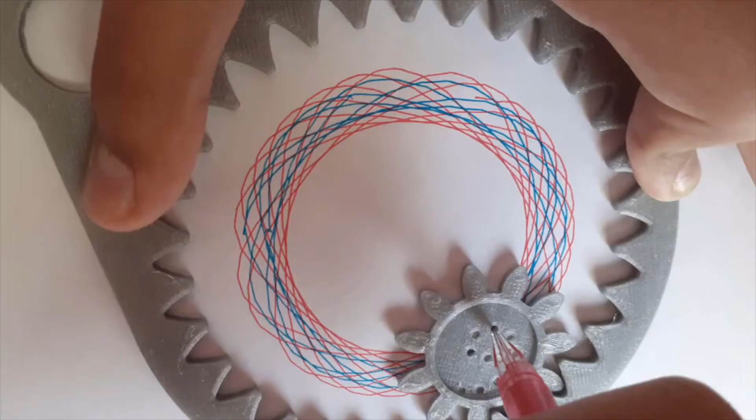Hi everyone, today we are making a puzzle cube in Tinkercad. This is a really interesting model because of all of the customization that it offers. We're also going to be taking a look at how the duplicate button works in Tinkercad, as it has a

really interesting feature. Let's first start by setting the snap grid on the bottom right corner to 0.5 millimeters. For me, the default was 1 millimeter. The snap grid just tells Tinkercad how much to move an object when the arrow keys are used.

When something is 3D printed, there's something called tolerance. This means that since the 3D printer has filament that it extrudes that isn't a perfect size, you have to give some space in the model for imperfections when you print. Since we're making a model that is meant to fit together, we have to be careful with tolerances to make sure everything slides together well.

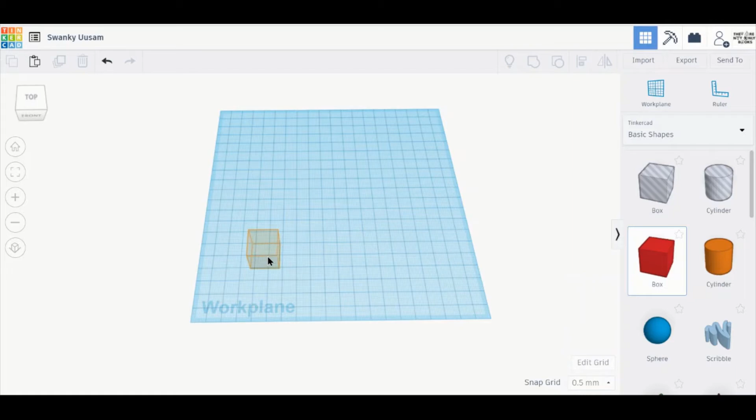Let's now drag in a cube. We're going to leave the size the way it is. Let's now click on the cube and press Ctrl D or the duplicate button on the top left-hand corner. This creates a duplicate of the object in the same place. We're now going to use the arrow keys to move it to the right until there's the smallest gap possible between the objects, which is 0.5 millimeters because of the snap grid that we set earlier.

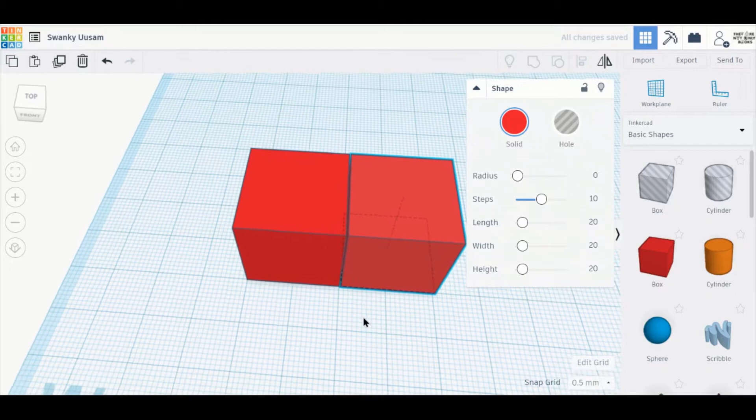Be careful that you don't accidentally deselect the object or else this next step won't work. Let's hit Ctrl D again, and you can see that the object automatically moves the correct amount to the right. The duplicate tool on Tinkercad can repeat changes made as long as the object isn't deselected. Great, now we have 3 squares.

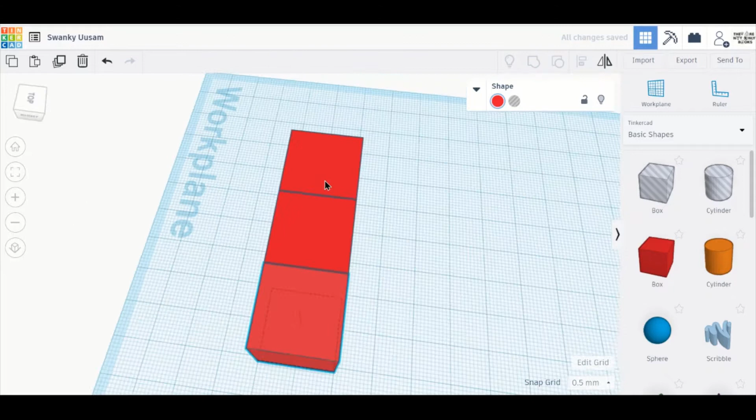Let's now rotate our view a little and select these 3 squares. Let's press Ctrl D and move all 3 to the right until, again, there's only 0.5 millimeter between the first 3 cubes and the second 3. Once the distance is right, we hit Ctrl D again and this duplication will repeat.

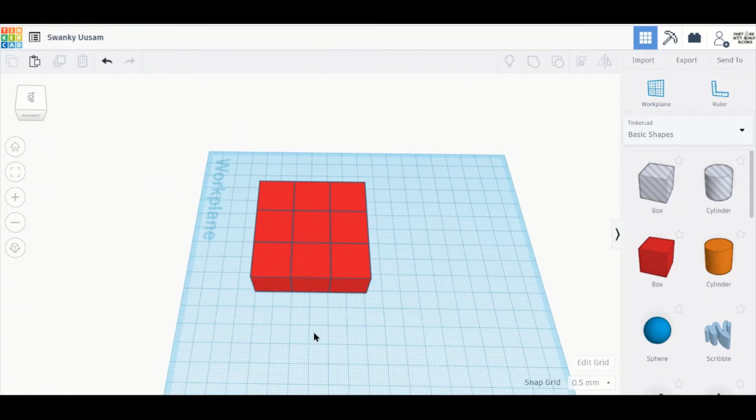Finally, we're going to select all 9 cubes, duplicate them, and move them up. The shortcut to move them up and down is to hold the Control key and the up and down arrow key. We're going to move this layer up until there's only 0.5 millimeter between them, and press Control D again. This creates a 3x3x3 cube of smaller cubes.

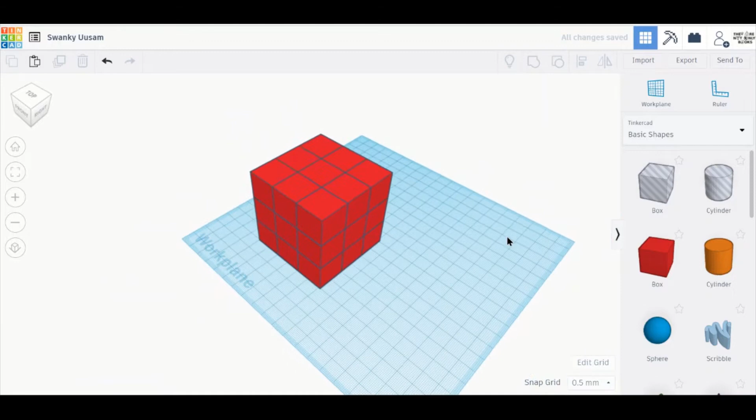Let's actually start making the puzzle now. The way we're going to do this is by connecting different small cubes so that they make puzzle pieces that fit together to make the final large cube. To make things easier to see, select all of the small cubes by hitting Ctrl A, and where you usually select the color, click Transparent. This makes all of the shapes see-through.

Let's start by making our first puzzle piece. We're going to be connecting these 4 pieces. Normally, you could just group the pieces you want, but because we have that 0.5 millimeter gap between all the objects, we have to go through a little more to actually connect the pieces before we actually group them.

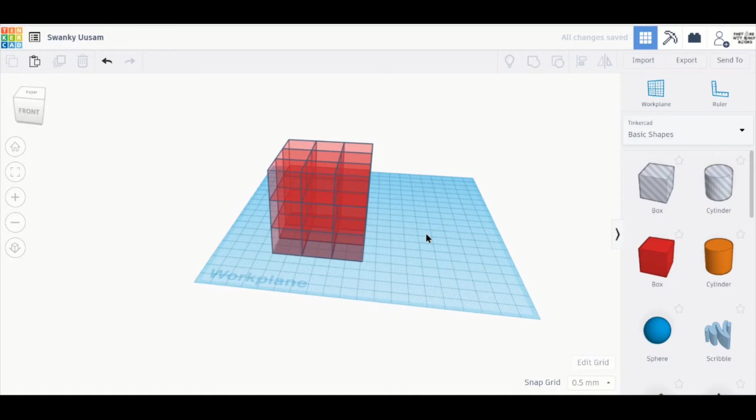This is done by stretching the shape so that they intersect with the piece that it's trying to connect to. We then group the cubes we are connecting by selecting them and pressing the group button, and then moving it off to the side so we can see what pieces have been used already.

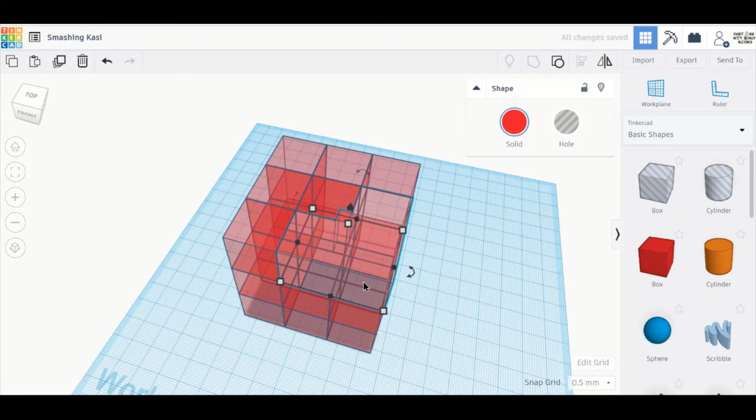There are some things to keep in mind when making your puzzle. First, you usually don't stretch one piece in 2 dimensions. This is because it will make your cube larger, and it will end up with a weird thing that doesn't fit with the rest of the puzzle. There are some exceptions where it would be okay to stretch in 2 dimensions, but only if the resulting cube would not poke out of the model.

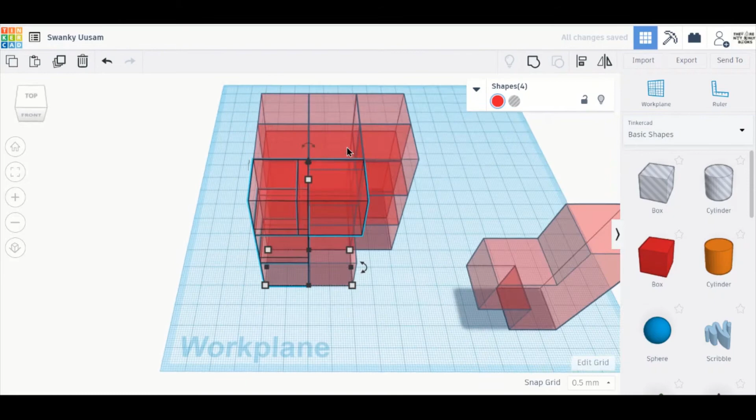Another tip is when there are 2 cubes on top of each other that you want to connect. The best way to do this is to stretch the bottom cube up rather than the top cube down. This is because the white dot that we use to stretch models vertically is on the top side of the model, and it would be difficult to try to stretch it down.

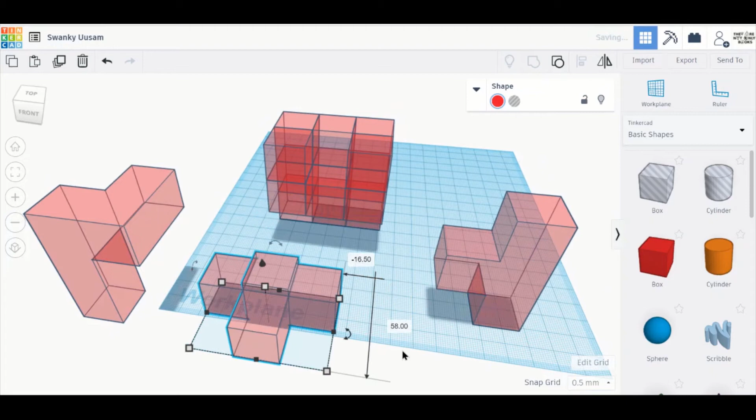Diagonals cannot be connected, so make sure that 2 pieces that are being connected have a face in common that can be put together easily. Finally, because of all of the shapes, it's easy to get mixed up and make a mistake, as I did here. Feel free to press Ctrl Z if you make a mistake and go back and fix it.

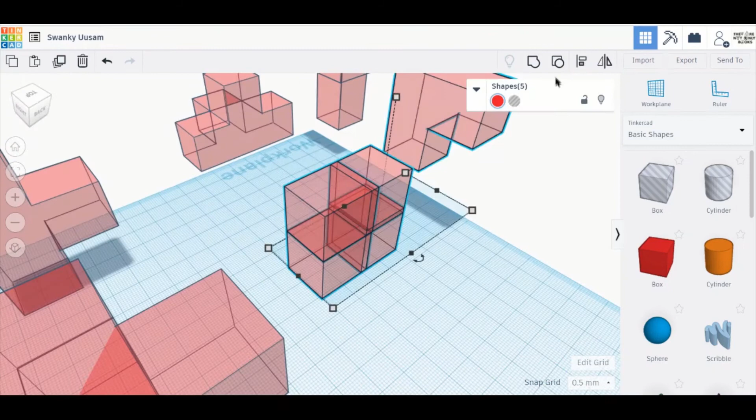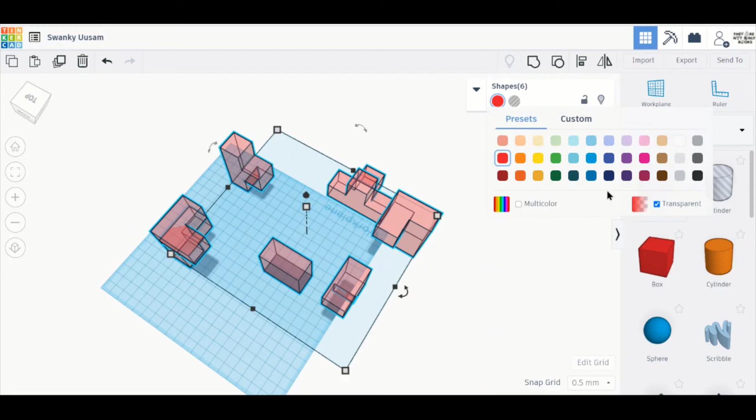Okay, so now that we have created all of our puzzle pieces, the last step is to get rid of the transparency so we can see the solid shapes. So we're going to select all of the pieces and go back to the color tab and uncheck transparency. At this point, it will be very easy to see if a connection was missed. If so, click on that piece, ungroup it, and reshape the cubes to fix the mistakes, and then regroup it.

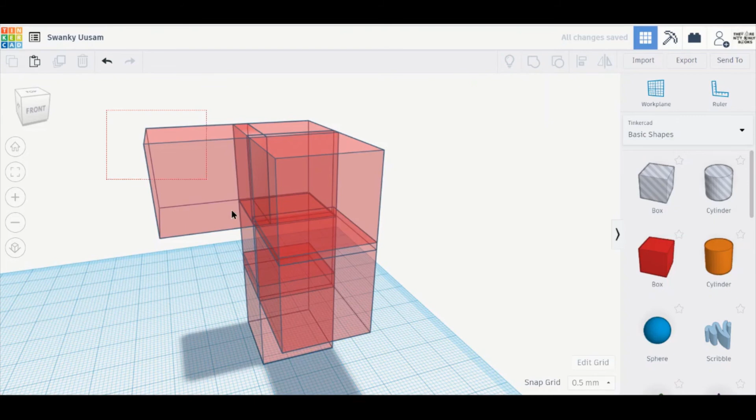Wow, I really messed this one up.

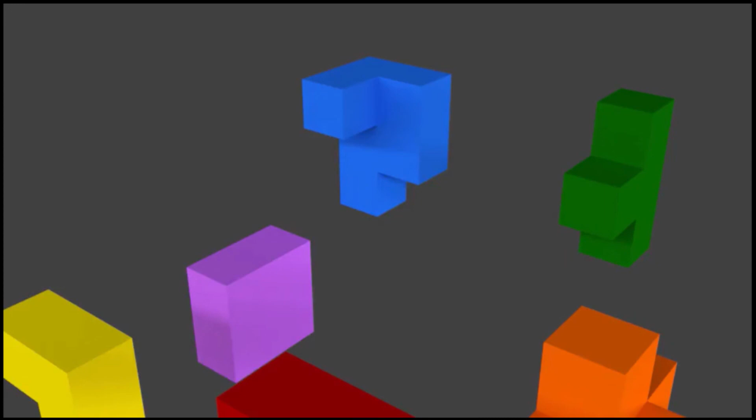Great, it's done. This is the finished product and how it goes together.